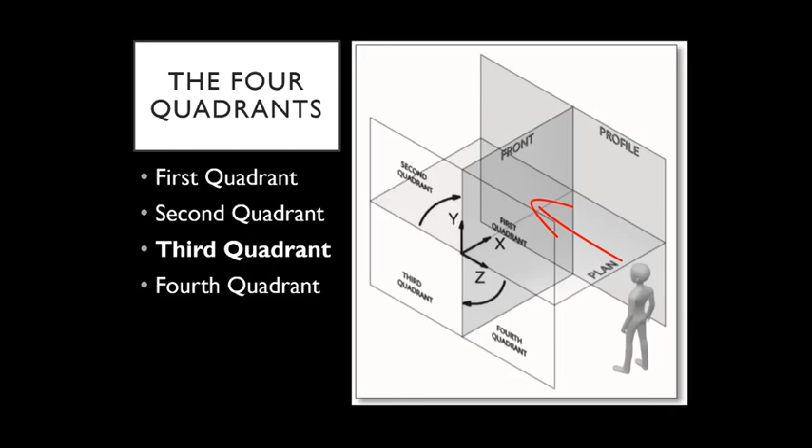If an object is placed in the first quadrant and its image is projected onto the front, plan, and profile planes, it is called the first angle projection. If the object is located in the third quadrant space and is projected, it is called the third angle projection method. The second and the fourth projection methods are not used.

The first angle projection method is used in some countries, such as many European countries, but we use the third angle projection as a part of our ASME standard. So we'll focus only on the third angle projection. So how does it work? It is best explained by using the glass box analogy.

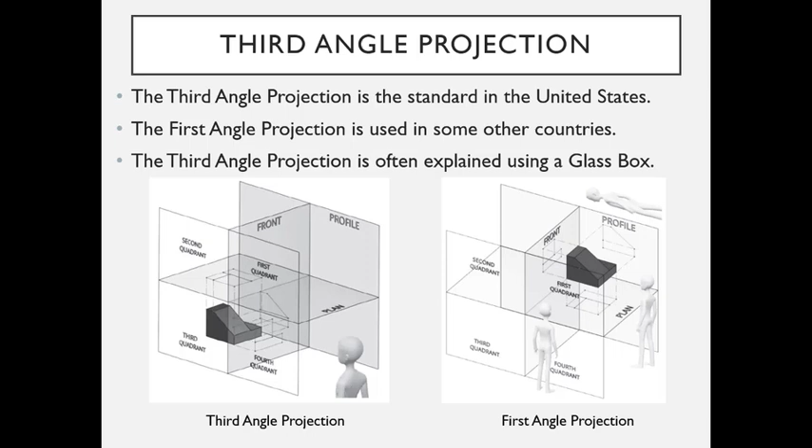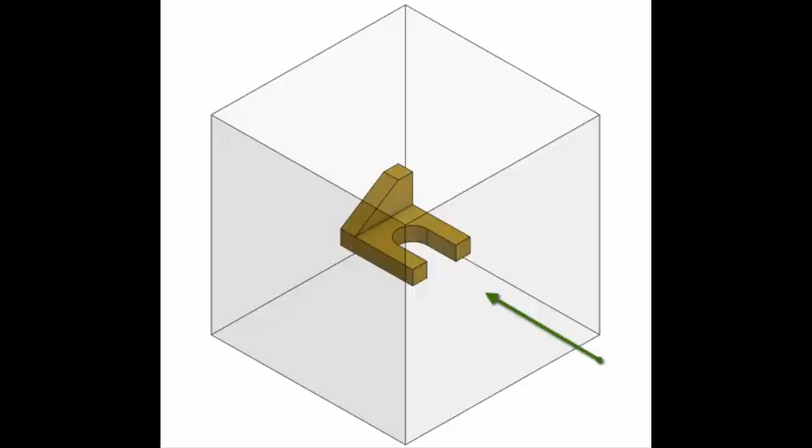All projections in engineering multiview drawings use orthographic projection. In other words, the object is projected onto the projection plane in the normal direction as illustrated in the left figure, in the third quadrant space, and the images are projected in the same way onto the front, profile, and the plan planes as shown in the figure on the right. This animation illustrates how each image on the glass box wall is projected from the object.

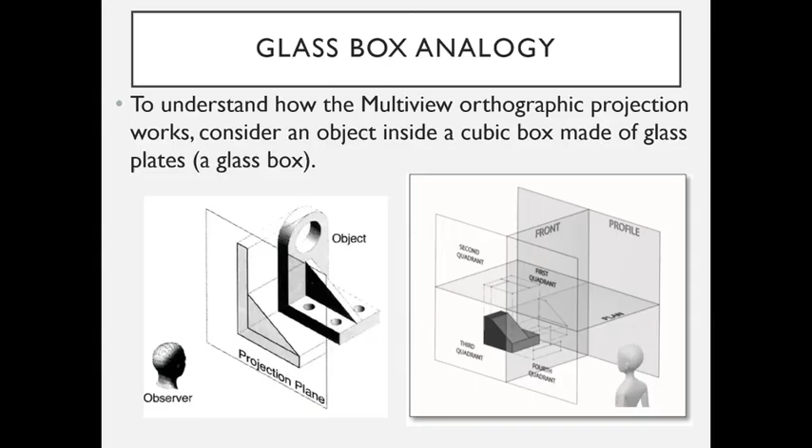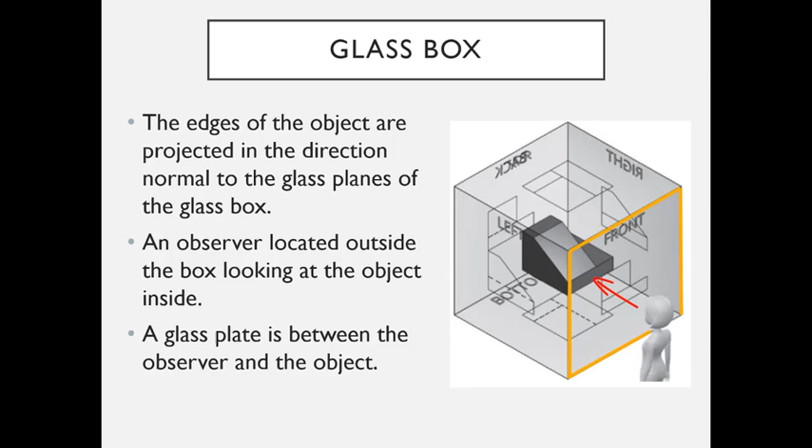Imagine the third quadrant space is a box made of 6 sides of glass plates, and the object is contained in the glass box. The image of the object is projected and etched onto the 6 sides of the glass box as shown in the figure. You are standing outside of the glass box, looking at the object through the particular plate marked as front.

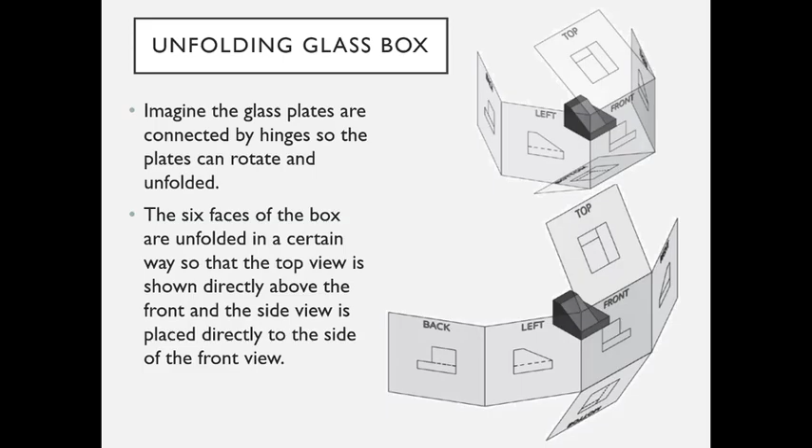Now, the glass box is cut along the corner lines, and all plates are unfolded onto the fixed front plane as shown in the figure. Assume each image is etched on each glass plane, so each image moves and rotates with its plate. Notice how each plane swings relative to the front plane, and how each view changes its orientation as the glass wall unfolds to the front plane. Here's an animation of a glass box being unfolded around the front plane.

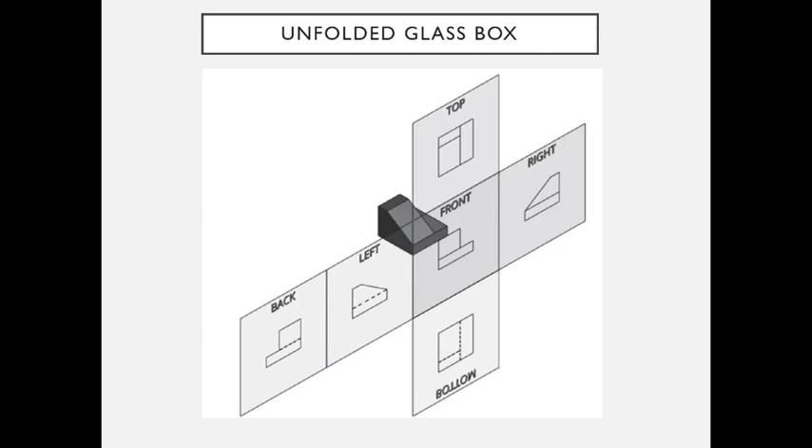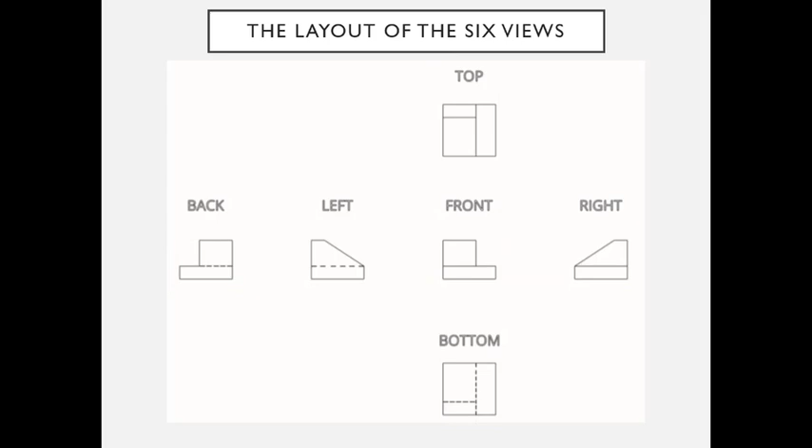This is the standard layout of the 6 views, and this is how the multi-views are displayed in the engineering drawings. There is the front view at the center. The top and bottom views are vertically aligned, and the left, right, and back views are aligned horizontally. These alignments are extremely important in the engineering drawings. In the drawings, there is no label for the views. The views are identified by their relative locations and the layout. So please do not add a label to each view.

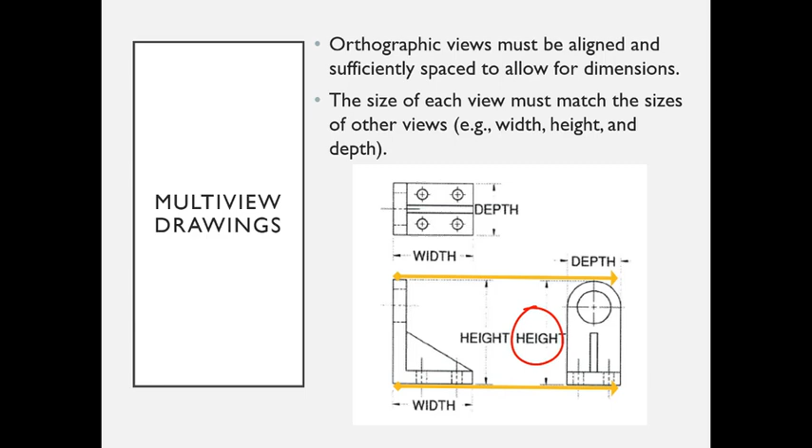In this drawing, only 3 views, front, right side, and top views are shown, and the views are aligned horizontally and vertically. So the width of the front view and the width of the top view are the same. The height of the front view is the same size as the height of the right side view. The height of the top view should match the width of the right side view. If you draw a horizontal line from the hole center line in the front view, it matches the center mark of the hole in the right side view.